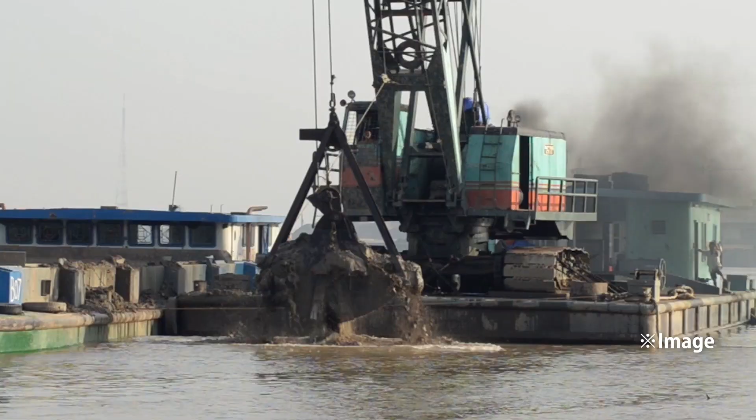As the removal of harmful sludge from the ocean becomes an urgent issue, problems are also arising between fishery workers and local residents over the removal methods, such as the secondary spread of pollutants and noise from machinery.

The Submarine Cleaner, a seabed vacuum cleaner, has been developed in Japan to solve these problems. This machine is expected to have a great effect on the problems surrounding the removal of harmful substances that have accumulated on the seabed in recent years.

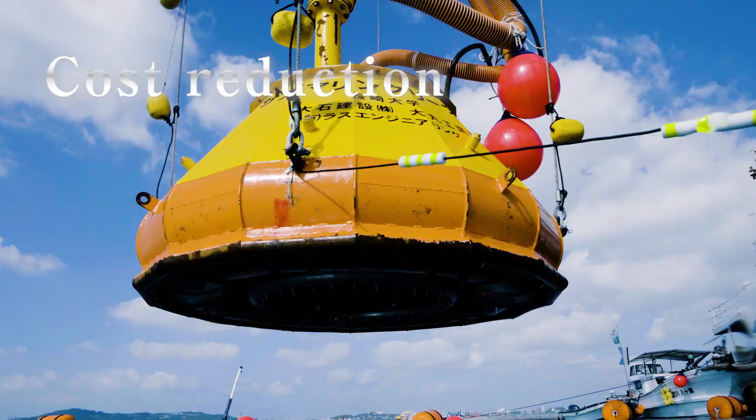Remnants of human habitation have accumulated over hundreds of years on the seabed of coastal areas where people live. Sludge builds up due to the influence of domestic and industrial wastewater that flows from rivers.

Dormant plankton cell cysts increase and cause frequent red tides, and heavy metals such as organotins that are used in ship hull paints do not dissolve and instead accumulate over many years. These have disturbed the biological system of bivalves and destroyed the biological system of entire fisheries.

Hoping to revitalize the fishing industry, in 2002, Japan's Nagasaki Prefectural Industrial Promotion Foundation, a construction company, and Nagasaki University teamed up to launch a big project to develop a machine that removes harmful sludge which accumulates on the seabed.

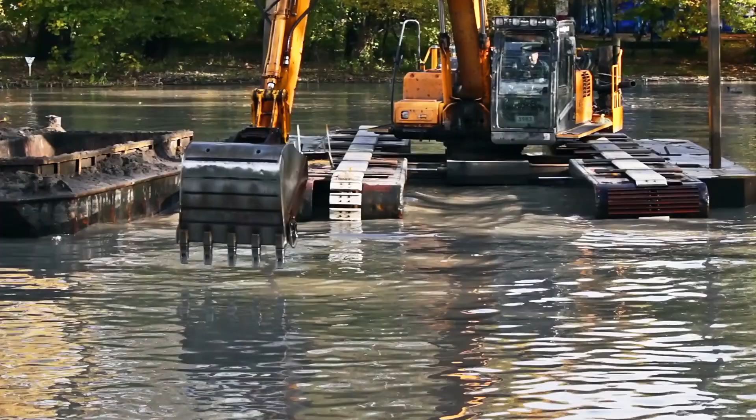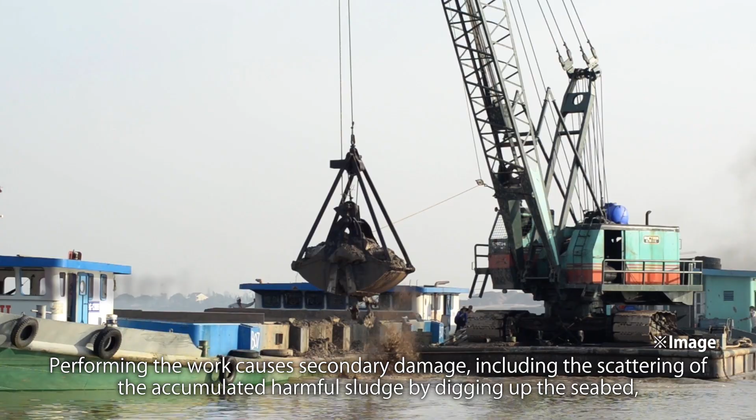Conventional styles of dredging, which use grabs, backhoes, or pumps to remove sand from the seabed, have many disadvantages. Performing the work causes secondary damage, including the scattering of the accumulated harmful sludge by digging up the seabed, which makes the water turbid and adversely affects surrounding areas such as fish farms, and loud noise from the machinery that makes nearby residents feel uncomfortable.

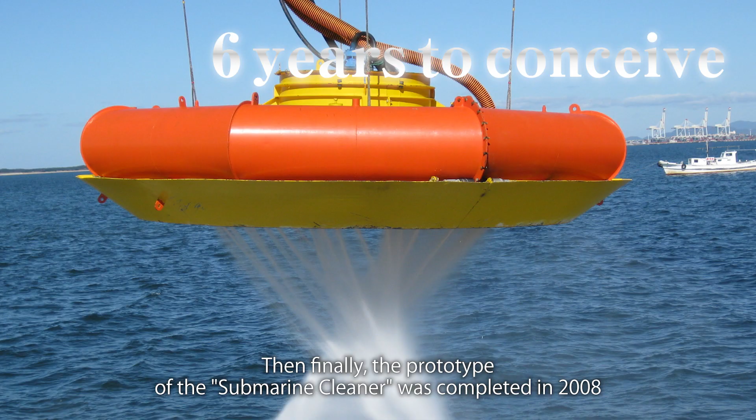Repeated indoor experiments and trial and error were performed at Nagasaki University in order to solve these problems, taking 6 years from the original conception. Then, finally, the prototype of the Submarine Cleaner was completed in 2008.

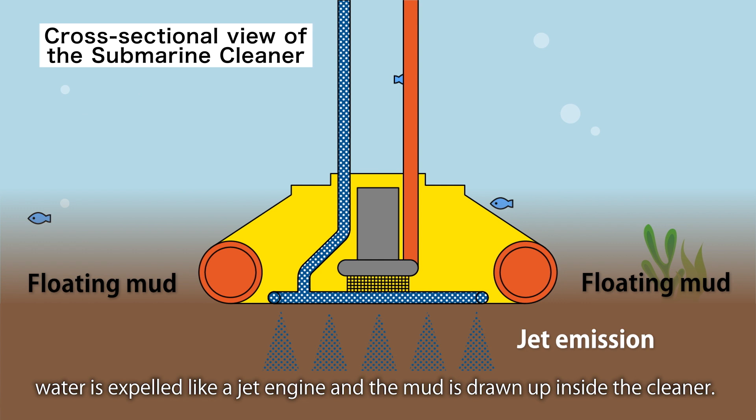When the Submarine Cleaner reaches the seabed, water is expelled like a jet engine, and the mud is drawn up inside the cleaner. Approximately 25 centimeters of sand from the seabed surface is stirred and lifted. By drawing up the fine particles of silt and sand in the mud, it is possible to dredge a thin 10-centimeter layer from the surface, which contains most of the harmful sludge.

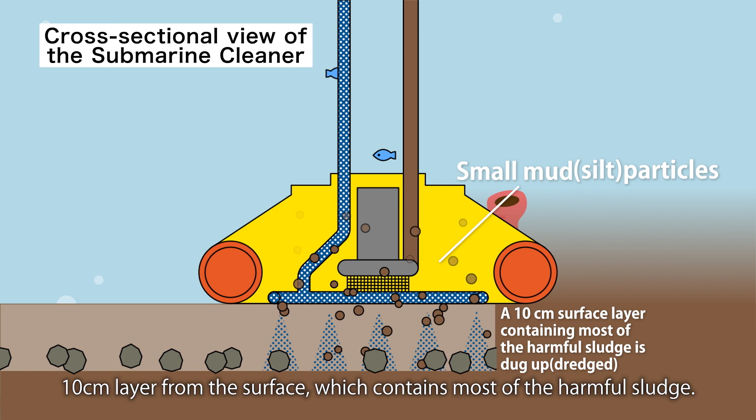As a result, the large stones and heavier sand which are not drawn up remain on the seabed, making it possible to remove the mud that floats easily, which was impossible with conventional methods. Because the mud that is drawn up does not leak out of the cleaner at all during this process, the sea does not become turbid, and the secondary spread of the harmful sludge does not occur.

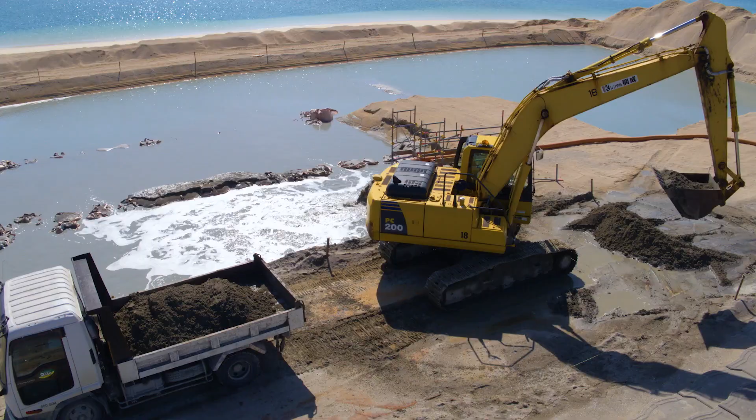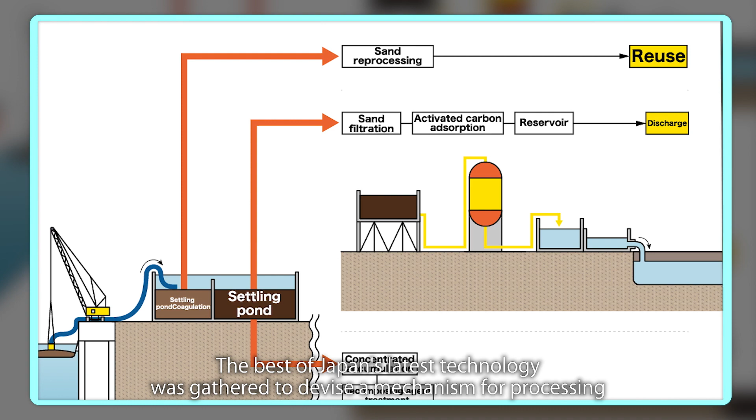In addition, a treatment method for harmful sludge to process the drawn-up mud was jointly developed with Kyushu University. The best of Japan's latest technology was gathered to devise a mechanism for processing the mud according to the pollution level of the harmful sludge.

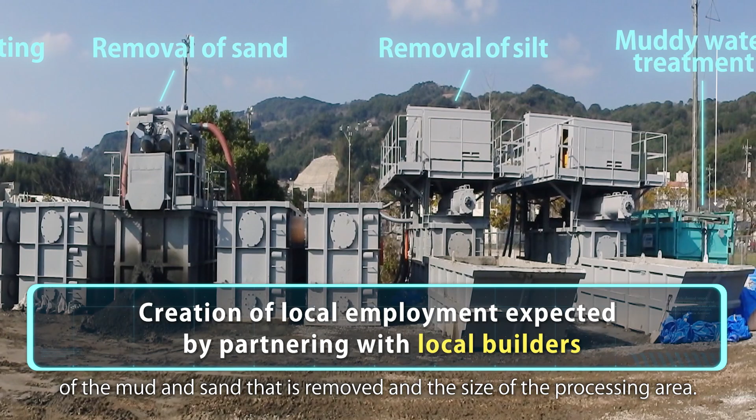This onshore processing can flexibly respond to the properties of the mud and sand that is removed and the size of the processing area. Therefore, cost reduction and the creation of local employment can be expected due to collaboration with local companies. The Submarine Cleaner has 4 advantages.

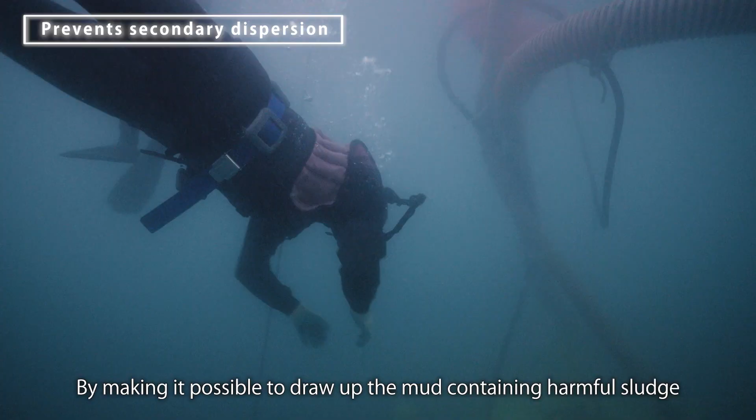The first is that cleaning can be performed without making the sea turbid. By making it possible to draw up the mud containing harmful sludge without secondary spread, it does not affect nearby fish farms, and there is no need to stop free-dive fishing. Fish can even swim peacefully right next to the unit while it is in operation. This is a scene that was unimaginable using conventional methods.

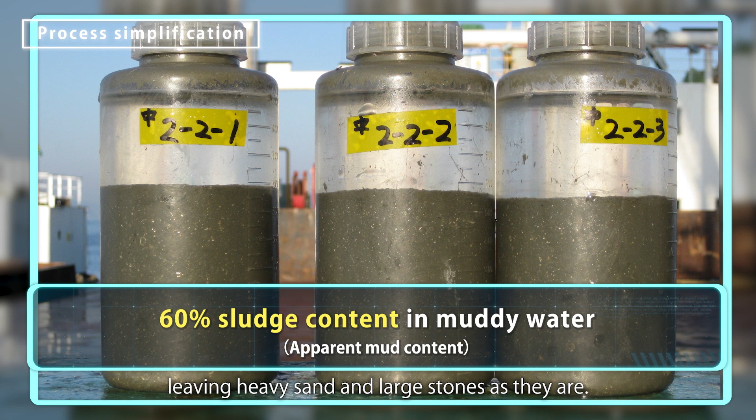The second advantage is the simplification of the operation process. Since there is no turbidity, anti-pollution films are not required, thereby reducing costs. Also, the ratio of mud contained in the drawn-up water is 60%. Removing only fine dirt is possible, leaving heavy sand and large stones as they are.

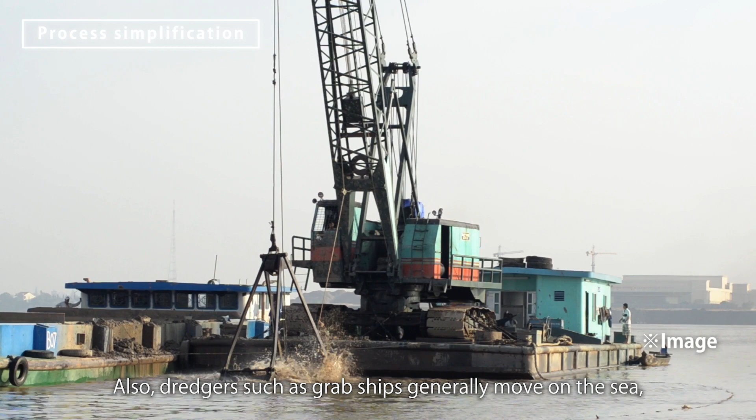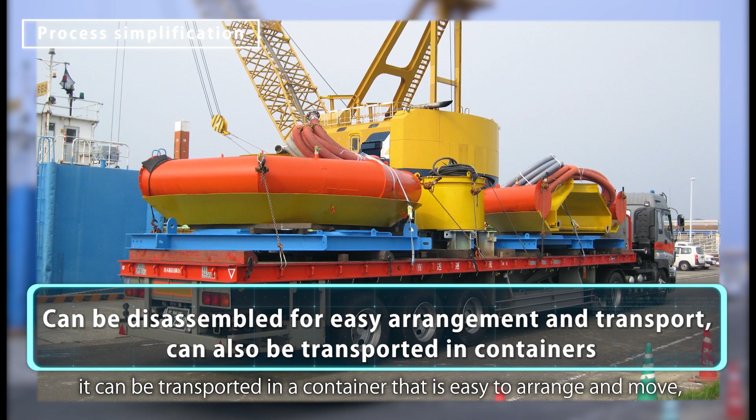By reducing the amount of excess sand and sediment that has been difficult to process until now, the formerly necessary large landfill site becomes unnecessary. Also, dredgers such as grab ships generally move on the sea. But since the Submarine Cleaner can be disassembled, it can be transported in a container that is easy to arrange and move, thereby reducing costs.

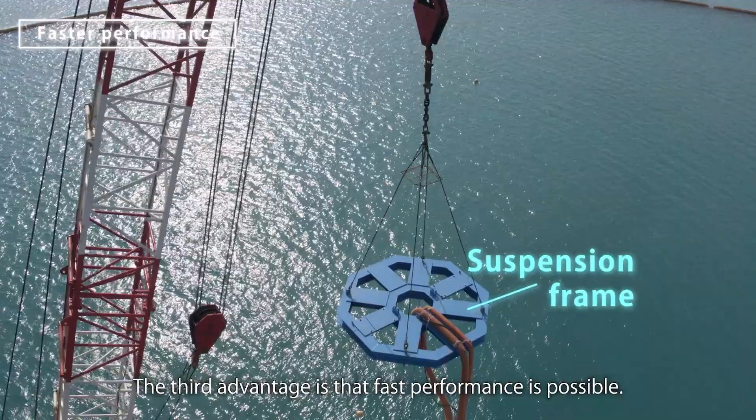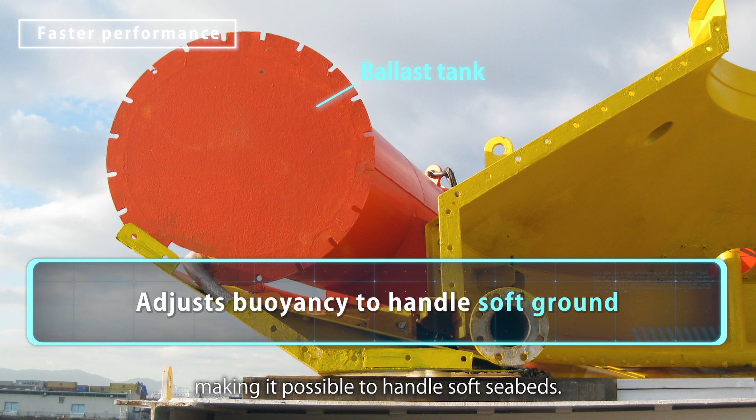The third advantage is that fast performance is possible. The sense of stability is improved by having a suspension frame on the main unit. And furthermore, the weight of the main unit can be reduced by adjusting the buoyancy with the attached ballast tank, making it possible to handle soft seabeds. As a result, smooth sliding operation is possible even on uneven seabeds. The device's capacity is up to 3,000 square meters per day.

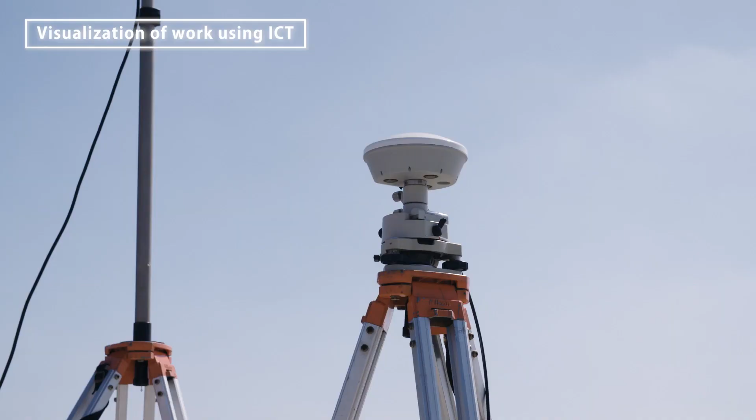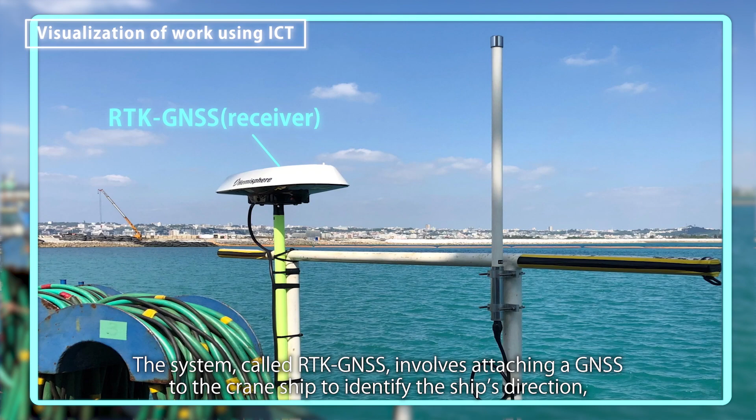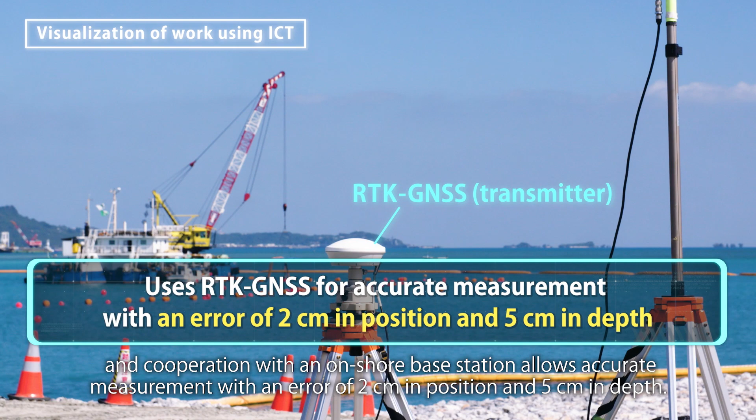The fourth advantage is visualization of the operations through Information and Communication Technology, or ICT. The system, called RTK GNSS, involves attaching a GNSS to the crane ship to identify the ship's direction. And cooperation with an onshore base station allows accurate measurement with an error of 2 centimeters in position and 5 centimeters in depth. The next operating instruction is given while confirming this information on a tablet in real time, which makes the work more efficient.

In addition, because the depth can also be measured, there is no irregularity in the depth due to overdigging, which suppresses the occurrence of the blue tide that is said to be caused by troughs. These 4 advantages have resulted in significant cost reductions.

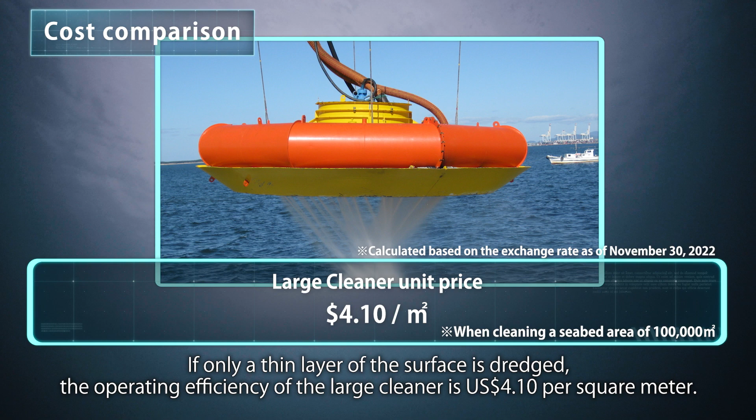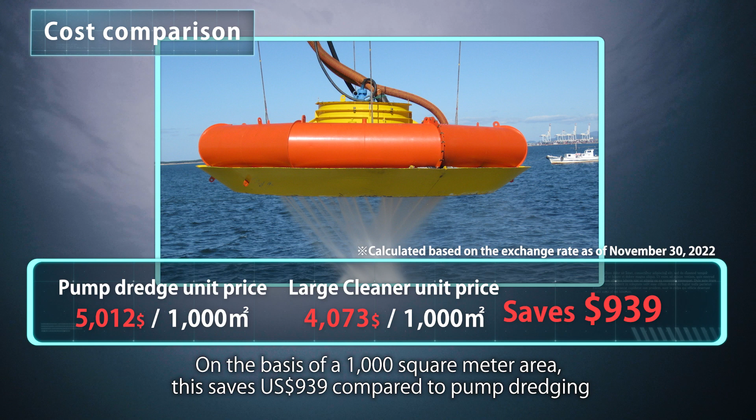If only a thin layer of the surface is dredged, the operating efficiency of the large cleaner is US $4.10 per square meter. On the basis of a 1,000 square meter area, this saves US $939 compared to pump dredging, and US $11,129 compared to grab dredging.

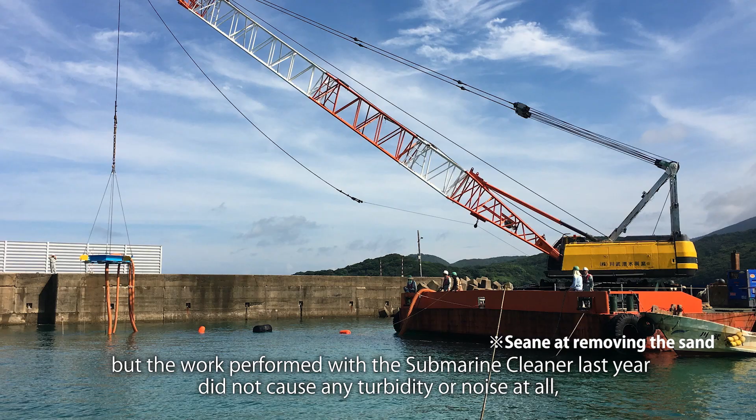Mr. Yamanaka, head of the Hirado City Fishery Cooperative Association in Nagasaki Prefecture, where the submarine cleaner has actually been used, has said the following. I was worried since abalone fishing, free diving fishing, and fixed net fishing would be affected if turbidity appears. But the work performed with the Submarine Cleaner last year did not cause any turbidity or noise at all, so there were no complaints during the work.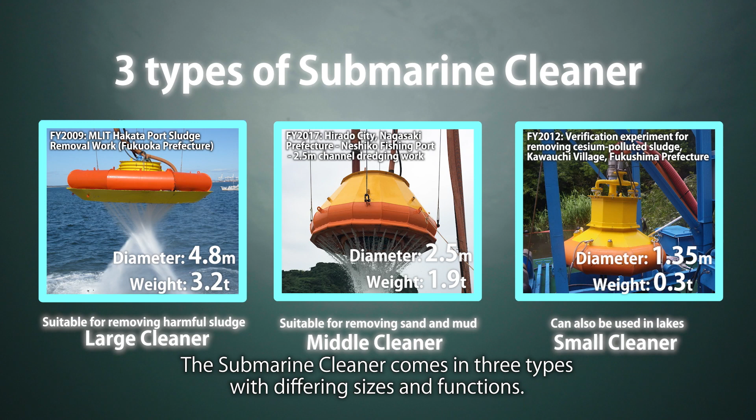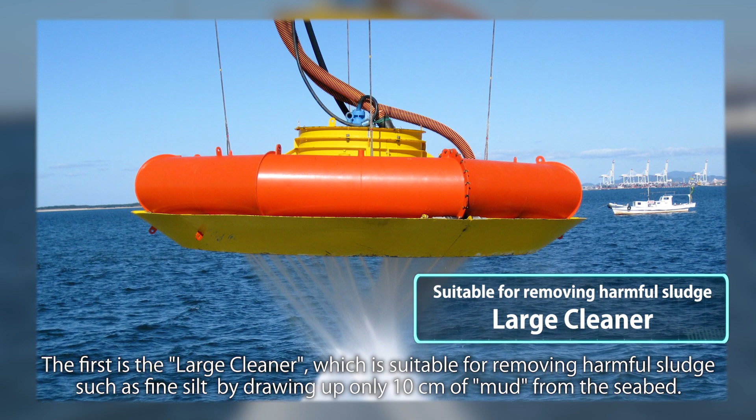The submarine cleaner comes in 3 types with differing sizes and functions. The first is the large cleaner, which is suitable for removing harmful sludge such as fine silt by drawing up only 10 centimeters of mud from the seabed. An intermediate frame can be attached, which makes operation possible at a maximum depth of 100 meters.

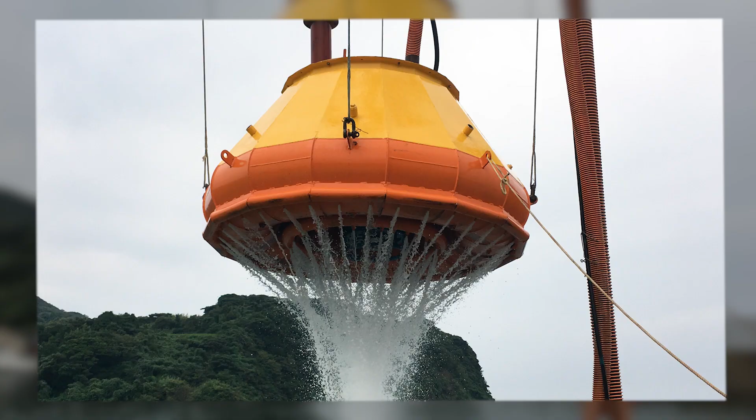The second type is the middle cleaner, which is suitable for dredging sand and mud by digging deeper underwater. It can be attached to the bow of a small boat, such as a diving boat, which allows work to be performed even in narrow fishing ports such as Komoda Port and Tamanoura Port in Nagasaki.

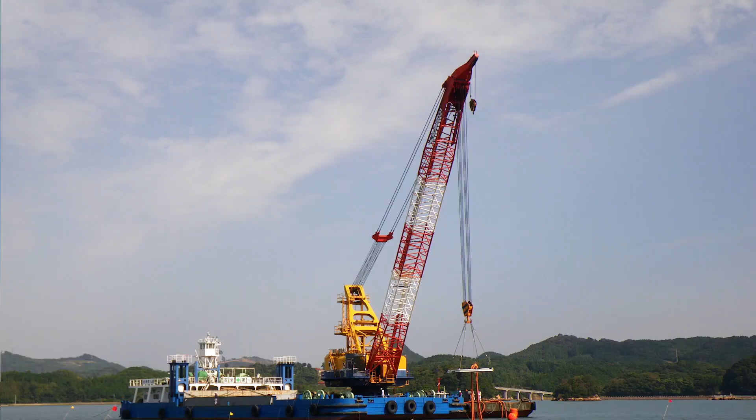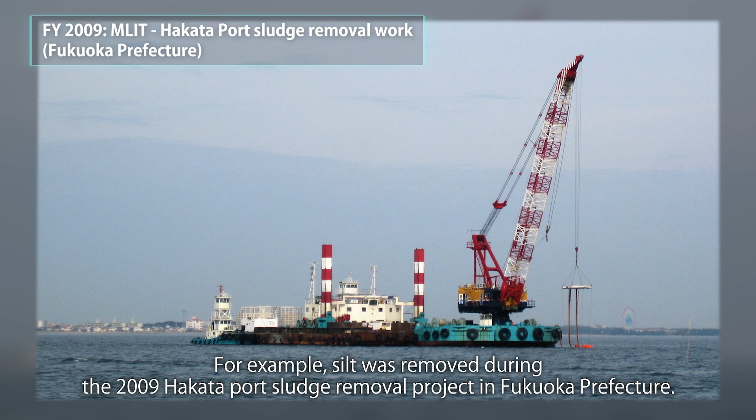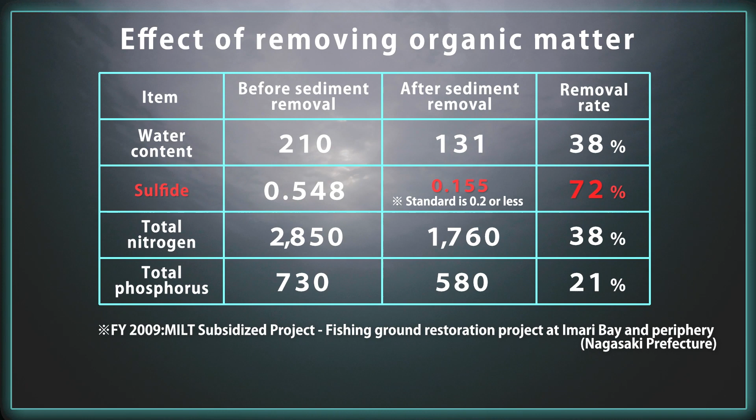The submarine cleaner has been used in many projects in Japan since 2009 and has produced good results. For example, silt was removed during the 2009 Hakata Port sludge removal project in Fukuoka Prefecture. By using the cleaner on the mud-filled seabed, the seabed was tilled, leaving behind clean sand and white shells. The submarine cleaner can also reduce sulfide deposits on the seabed by 72%.

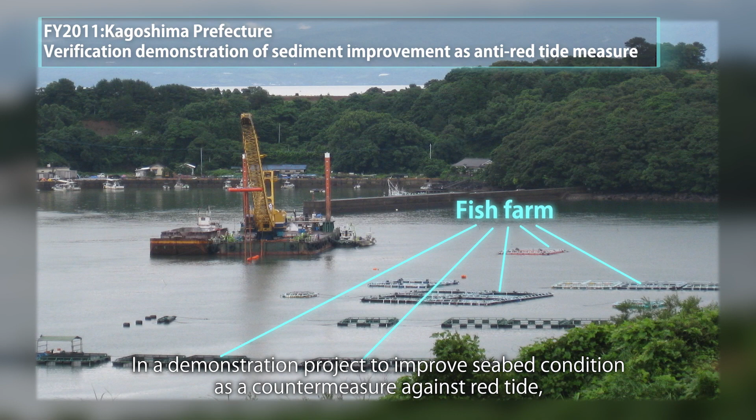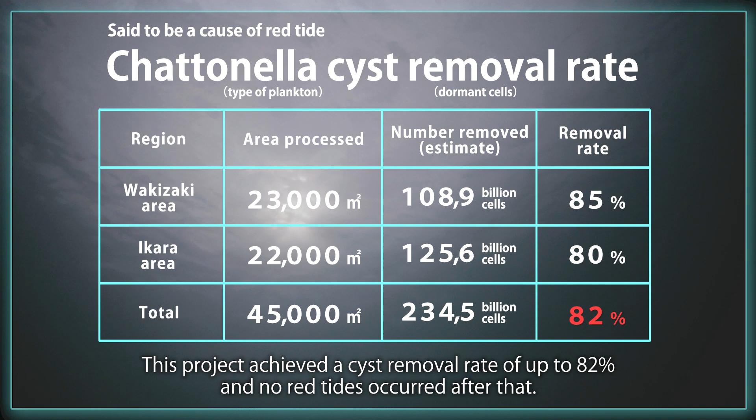In a demonstration project to improve seabed condition as a countermeasure against red tide, which was conducted in Nagashima Town, Izumi District of Kagoshima Prefecture in the 2011 fiscal year, dormant cells, which are called plankton cysts and are said to be the cause of red tide, were removed. This project achieved a cyst removal rate of up to 82%, and no red tides occurred after that.

The middle cleaner was used in the 2014 fiscal year at Tamanoura Port in Nagasaki Prefecture to neatly remove sand that had accumulated at the wharf's seabed to secure water depth without moving the rocks on the seabed.

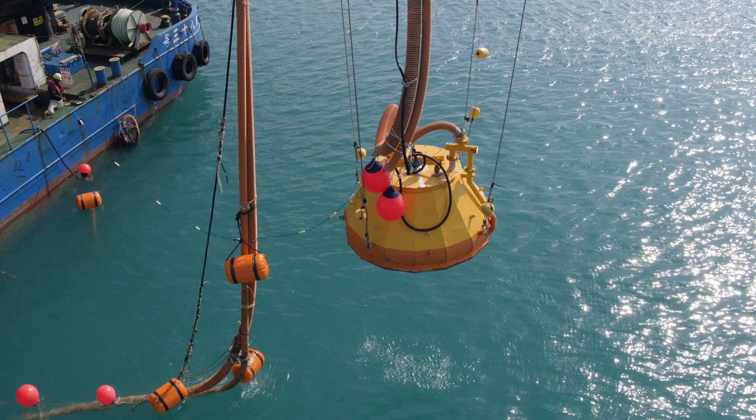The submarine cleaner's breakthrough technology has received various awards, including the Excellence Award at the First Fisheries Infrastructure Development Sector Awards, sponsored by the Japan Fisheries Agency, and the Excellence Award at the 13th National Technology Development Sector Awards, sponsored by the Ministry of Land, Infrastructure, Transport, and Tourism, and is starting to be praised from all directions. It is also attracting attention in other countries beyond the sea.

We have appeared on the Vietnam government's website, and a briefing session has been held in Korea, and we are receiving a large number of inquiries, said Mr. Suenaga, the submarine cleaner's developer, when asked about future developments. The pollution that Japan experienced is starting to occur in developing countries, which is something I want to address.

In the future, the submarine cleaner is also expected to be effective in the removal of pumice that has flowed from volcanic eruptions and the removal of microplastics from the ocean, which is a global marine environmental problem. The big project to clean the ocean's seabeds may have just begun.